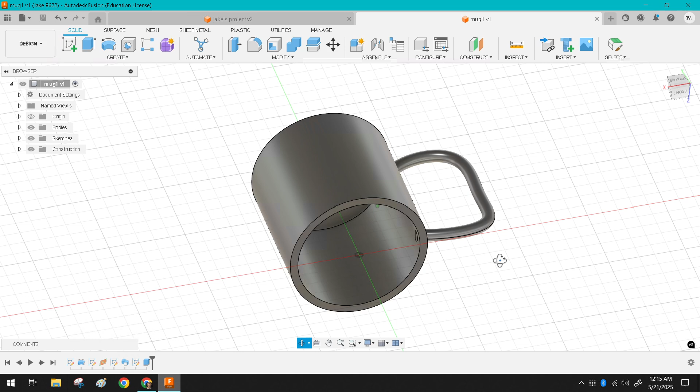I'll walk you through how to design a mug today. This is going to be similar, if not exactly, the final product we end up with today.

Start by creating a new design. First, I'm going to force the view to the top view, and I'm going to create a custom sketch. I'm going to select this plane, and I'm going to choose the size of my mug here.

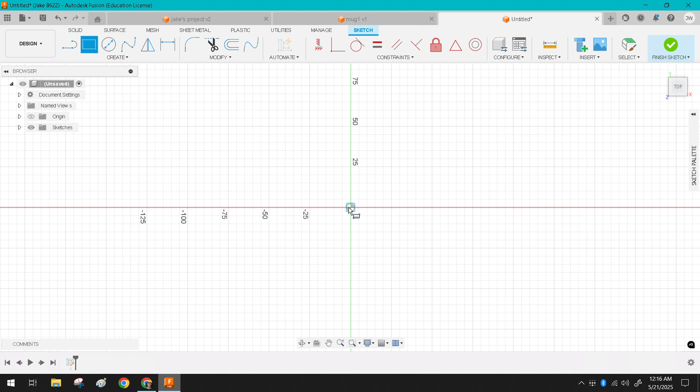For this mug, I'm going to do 90 millimeters tall and 45 wide. I'm choosing 45 here, that way it'll be 90 by 90. We're going to rotate it around the center axis here.

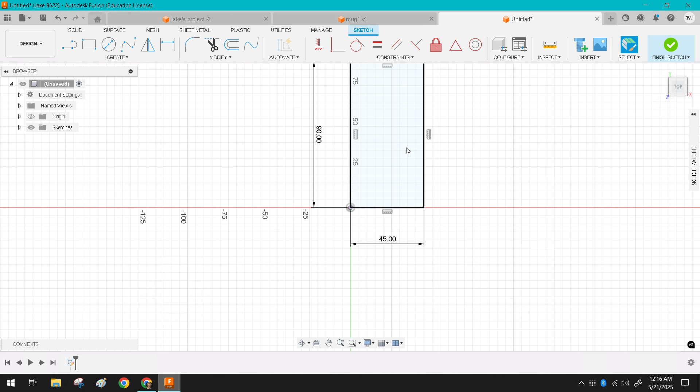We're going to click Finish Sketch, moving the view up here so we can see better. We're going to revolve around the center line here. That way we end up with a complete cylinder shape.

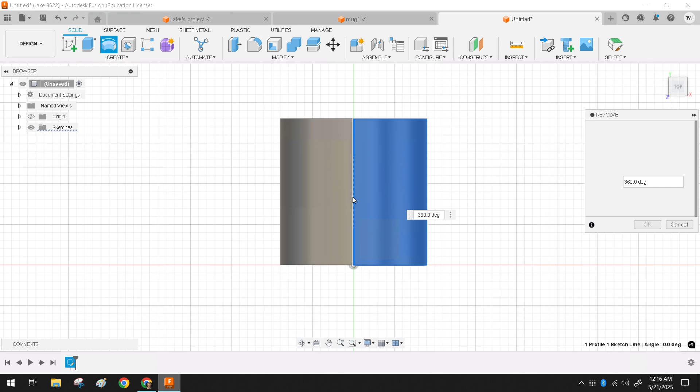So we have our profile selected already. We need to select our axis. Our axis is going to be the center axis here. Everything else is new body.

It should be correct. I'm going to pan. This is our new shape, the beginning of our mug. Going back to our home view and selecting top view.

Next, I'm going to start on the handle. So, from our top profile, this is actually the literal side profile of the mug.

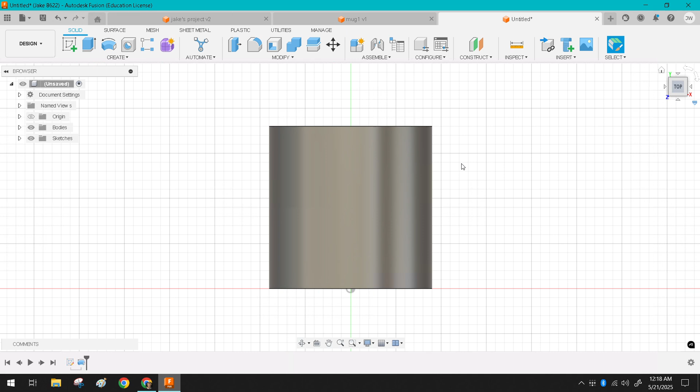Going back to our top view here, we're going to create a new sketch. I'm going to select the plane corresponding to our top. I'm going to move our view back, and I'm going to create a fit point spline.

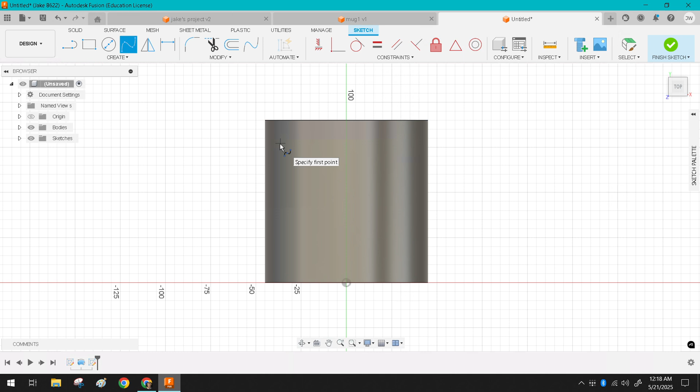This is going to represent our handle. I recommend that you start in just a little bit from the outside edge of the mug from this view, and that you do not extend past the top and bottom. You may if you wish to, but it'll cause the mug to be hard to use.

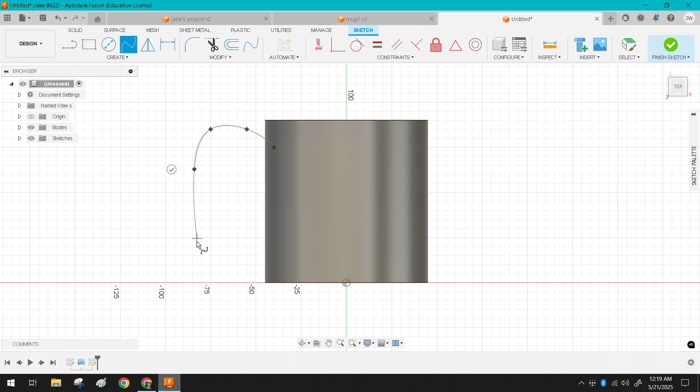So I'm just going to choose a point that's near the top, somewhere convenient as a handle, and I'm going to shape the handle here. You can choose any shape you want. I'm making kind of a funny shape just because I can.

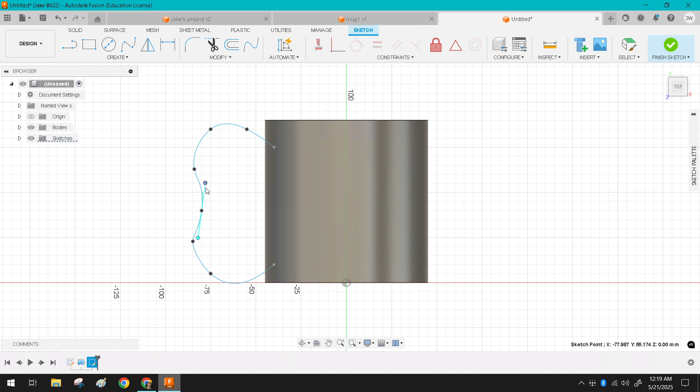When you're done, press the Enter button on your keyboard. This is going to be our finalized shape. If you'd like to adjust it, you can adjust it here. If you'd like to move points around, say for a very funny shaped handle, this would be the best time to do it.

I'm going to click Finish Sketch. Next I'm going to construct a plane along path, and select our path. Here you can see it gives us the option of the plane. We can put the plane anywhere we like. We're going to move it all the way to the very beginning. Press OK.

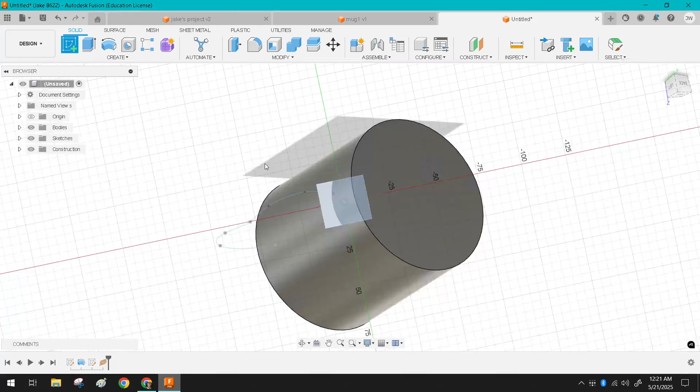For the next step, we're going to create a sketch along this new plane. This plane is going to follow that shape we created earlier for the handle. You can choose a rectangle, a square, or a circle. If you'd like a custom shape, you can fit point spline it. Say you want an oval, you could create an oval.

I'm going to stay simple and create a center diameter circle, and choose the center of our plane. I'm going to make the handle 8 millimeters around, and finish the sketch.

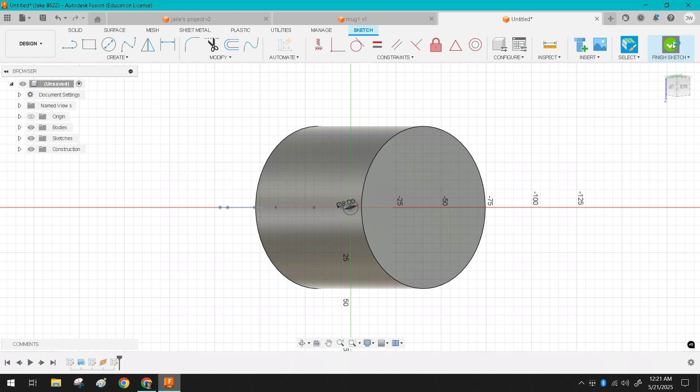For this next step, I'm going to go into our Create menu, and I'm going to sweep. This is going to create a three-dimensional shape both along our path that we created for the handle shape and this plane.

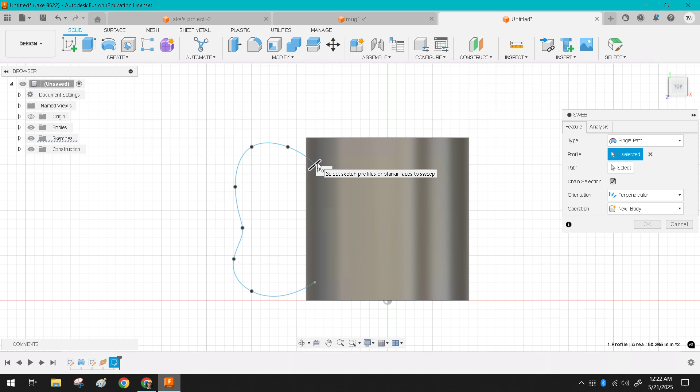I'm going to select our object, this profile that we created earlier—mine was the 8mm circle. I'm going to go to our sweep console and select our sweep path. By default, the operation is set to cut, so it's going to remove material here and here. There's no material here to remove right now, so it won't do anything.

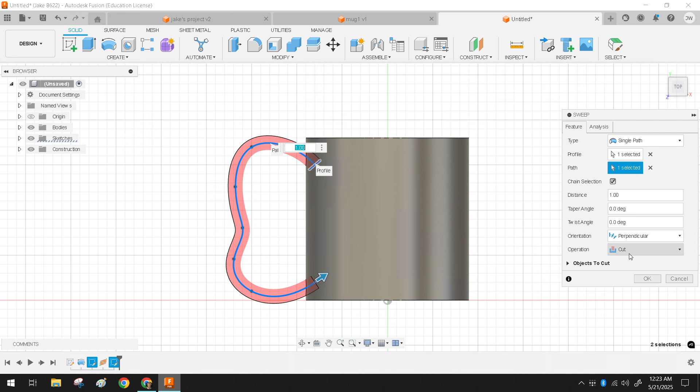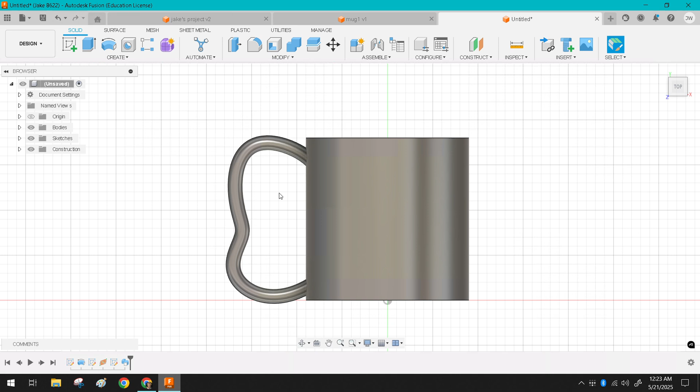I would like to create a new body, and I'm going to keep it perpendicular. If I were to set it to parallel, the handle wouldn't be possible—it just isn't. So I'm going to keep it perpendicular to the path of our sweep and press OK. You can see our mug is coming along.

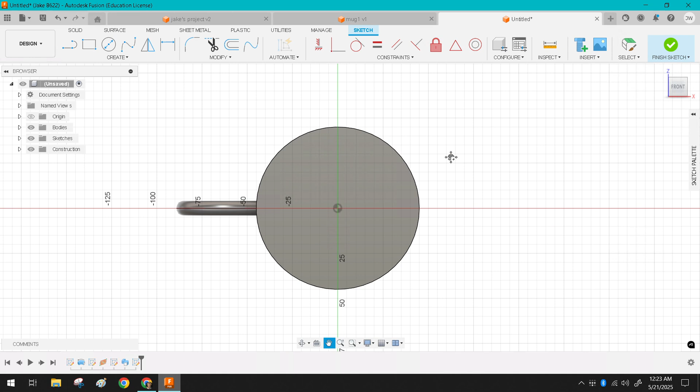Unfortunately, it can't hold any liquids right now. To make our mug hold liquids, I'm going to create a new sketch, and select the front plane. Make sure that you select it from the direction you would like the mug to be open. For example, you'd want to select the side that you believe should be open.

I'm going to select this side, and use center diameter circle, making sure that I'm centered. I already know that earlier I made a radius of 45, so if I made a radius of 45 again, I would have my diameter of 90.

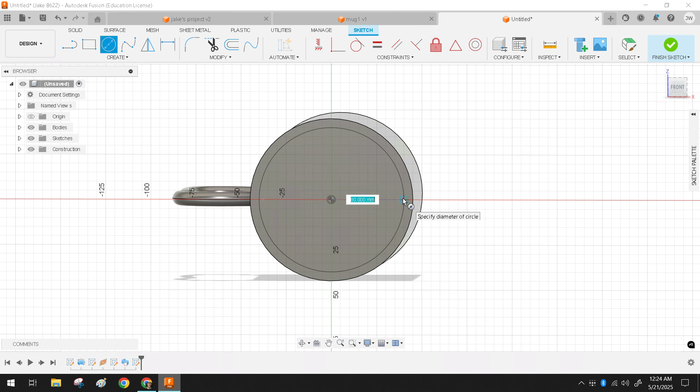I'm going to go in 10—actually, I'm going to go in 8. So the difference between 88 and 90 is going to be 2. I'm going to press enter. And now we have our circle with our 2mm thick wall.

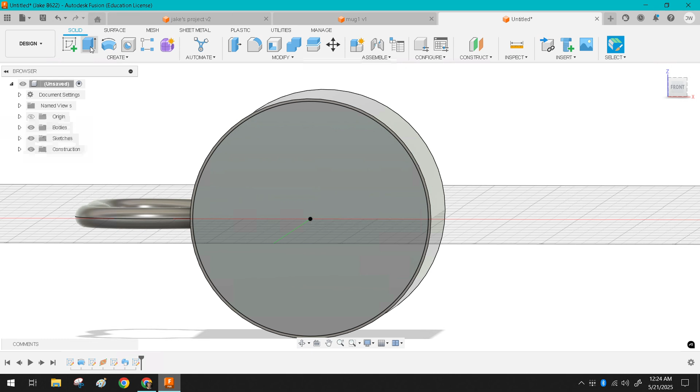I'm going to press finish sketch, and I'm going to extrude the mug. I'm going to change the view here by pressing shift and middle mouse wheel, so I can easily see the side. We already have our profile and profile plane selected.

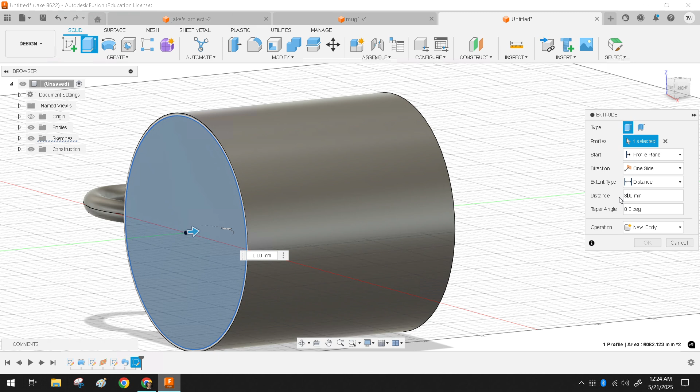I'm going to have our distance set to 88.00 millimeters. That will leave us with a bottom face that is also 2 millimeters thick. I'm going to press OK. And as it was already set to the cut command, we now have a mug with wall thicknesses that are 2 millimeters.

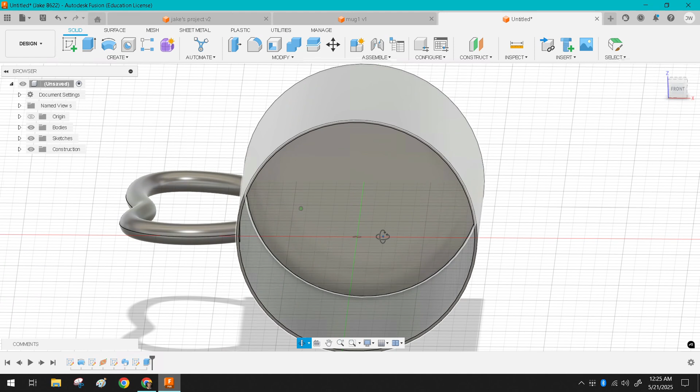If you'd like your walls to be a little bit thicker, for example, I'm going to go back to the sketch.

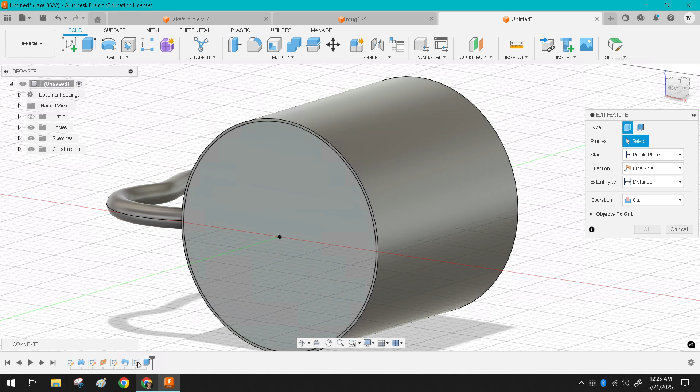There we go. I'm going to change this wall thickness to be 10 millimeters thick, that way it matches our handle. Finish sketch. It's gone back and updated our wall thickness to be 10 millimeters thick.

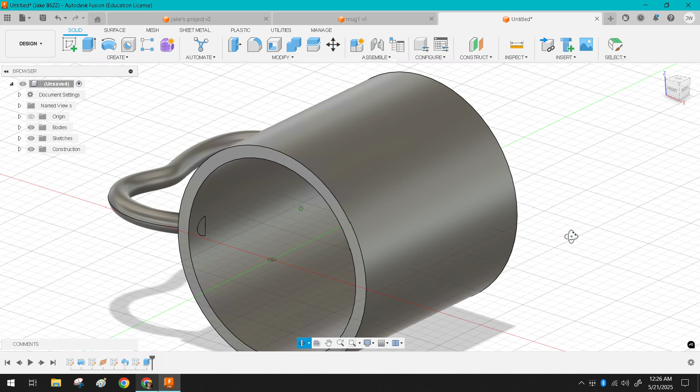Here's our completed mug. If you would like to have this 3D printed, you can always go over to Utilities and Make. In the Make menu, you can export as a STL, 3MF, or object file. Most slicers will take an STL file.